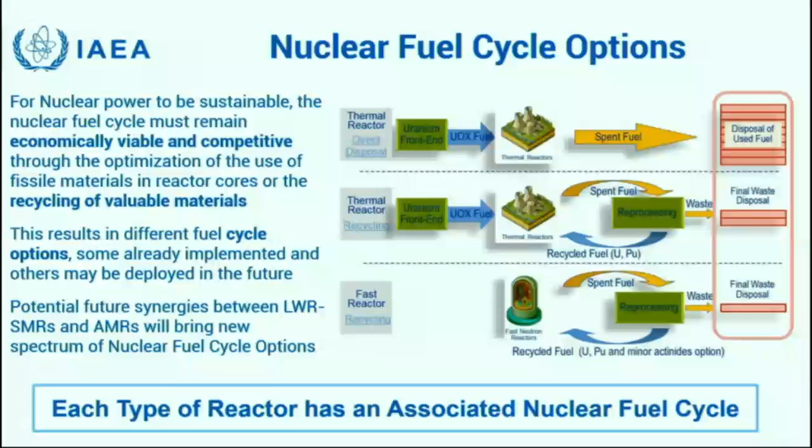This results in different fuel cycle options. The two first are already industrially implemented: the open cycle, which considers spent fuel as a waste, and the mono-recycling of uranium and plutonium. The advanced fuel cycles that will be implemented in the future will go through multi-recycling in light water reactors. And now with the incorporation in the near future of different SMR technologies, it will bring also a new spectrum of nuclear fuel cycle options to be considered.

With this in mind, we organized in September 2022 a technical meeting on back end of the fuel cycle considerations for SMRs. It was very well attended, with more than 100 people here attending the technical meeting.

There were about 16 online, 50 here in Vienna, and 3 international organizations. We broke out into different sessions because we discussed together, not wanting to leave any technology aside. During the breakout sessions we considered light water reactors, HTGR prismatic and pebble beds, and advanced modular reactors including fast reactors and molten salt. All discussions, conclusions, and material gathered during the technical meeting were compiled.

This was published as an IAEA TECDOC in December 2023 with reference 2014. We also conducted last year the IAEA international workshop on the chemistry of fuel cycles for molten salt reactor technologies, in cooperation with the OECD NEA. We had 4 developers and 40 experts from researchers and industrial partners who had worked for 30 years or more on molten salt and pyrochemistry.

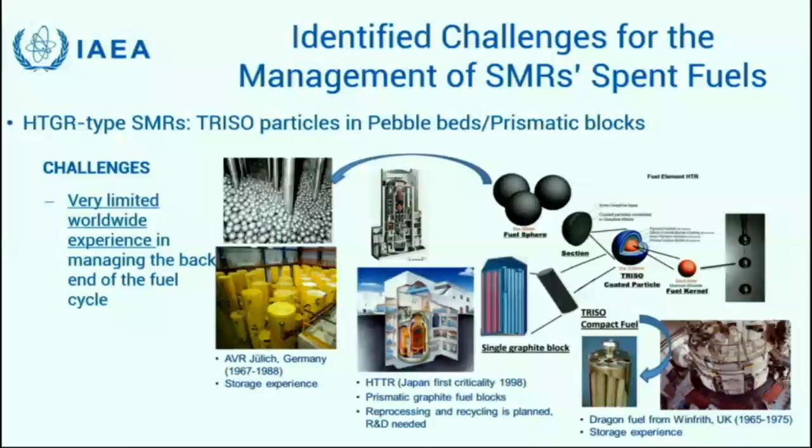For HTGR pebble beds or prismatic reactors, there is limited experience, found in Germany, UK, and Japan. Japan is also looking into processes for recycling TRISO particles. If these SMRs are deployed in countries with less mature programs or even non-nuclear countries, the supply chain will need to be developed to provide services to manage those spent fuels.

For fast reactors, the challenges will be more or less the same as those seen in large fast reactors, with new fuel characteristics like metallic fuels, nitride fuels, more plutonium content in oxide fuels, and the chemistry of those fuels. These are foreseen to be multi-recycled, so multi-recycling needs to be pushed ahead, either through light water reactors or going beyond to fast reactors.

In the case of molten salts, the chemistry is very challenging and aggressive. We discussed how to keep the loop with all these different types of fuels, how to keep recycling the fissile material in the core, how to extract the fission products, and how to manage the spent salt as a waste with all fission products inside. So this is a brief overview of the back end.

For transportation, it's package content specific, so we'll need to develop new solutions. We saw yesterday some industries developing solutions for transporting microreactors. What are the safety standards today? All the regulations are based on SSR-6, so new requirements will need to be identified and developed.

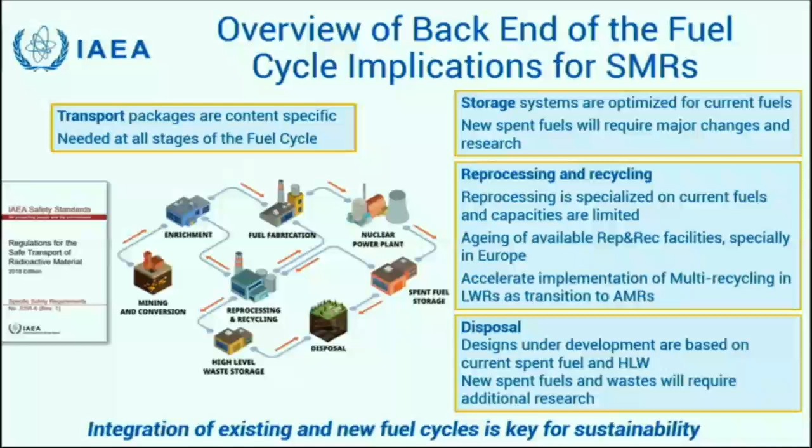With all this in mind, we received a recommendation from member states to the IAEA to launch a coordinated research project on challenges, gaps, and opportunities for managing spent fuel from SMRs, with the main objective to identify viable nuclear fuel cycle options for the different technologies, what can be used today, what can be derived from current technologies, and what will need fully new development from scratch. We also aim to prepare a list of generic key parameters for countries to perform their analysis within their own context and boundary conditions.

What we expect as our main outputs is to develop specific roadmaps for the different fuel cycle options. We have already identified the potential scenarios, let's call them like this, and then identify the nuclear fuel cycle facilities needed, the technology readiness level of the different technological solutions, which nuclear materials will be involved, and what waste forms will be generated, and which infrastructures will be needed.

We are not going to address everything, but identify what will be needed as an input to other activities, like human resources development, financing, which R&D will be needed, which demonstrators, and what can be the enablers and synergies between the different technologies for the fuel cycle.

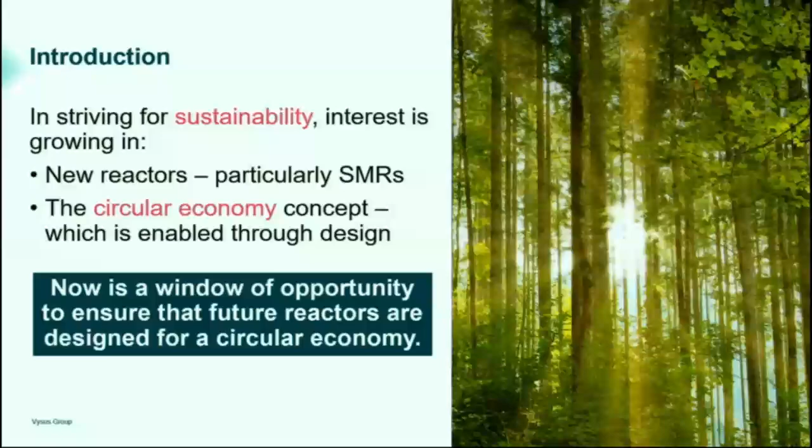So what is then a circular economy? Well, it focuses on the resources, the materials, and it promotes using, in short, as little as possible for as long as possible. There are many formal definitions. They haven't really landed yet, in my opinion, but these are kind of the common denominators. A circular economy is not the same as the waste hierarchy. There are common elements, certainly, but again, circular economy is much broader, much bigger.

Another key feature is that it cannot be achieved by one organization alone. So a lot of research right now is going into circular supply chain management.

Another highlight of a circular economy is that it's very much an emerging field, so no one really has all the answers at this point. It's ongoing work. But the work to date has mainly been focused on products that are transportable - think your washing machine or your car or your pens or materials like plastic - or it's been focused on the conventional built environment, your homes, your offices, and so on. But what does it mean for a complex industry like the nuclear sector, where each site consists of thousands of different products, components, and systems, made up of almost endless amounts of types of materials?

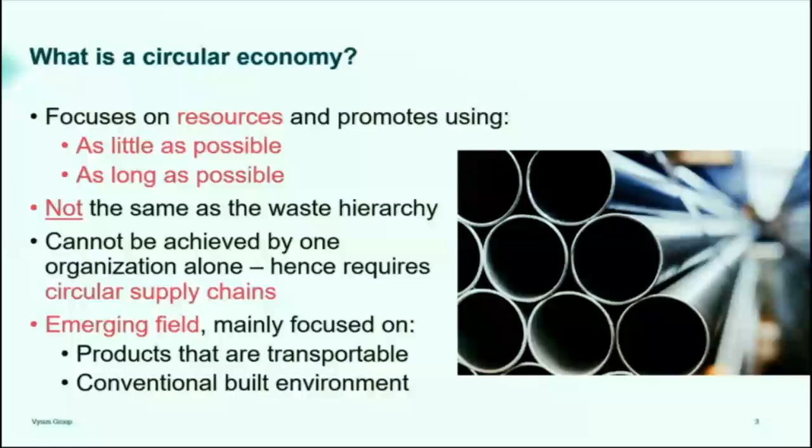Well, to start, I've been arguing for a few years now that we need to look at it really from a site level and approach a nuclear site from a circular perspective. I know we're hardwired almost in our industry to think linearly of the licensing steps, but from a site perspective, I don't think that makes sense, because once you've sited one facility and you constructed it and you started using it, that site will kind of forever be earmarked as an existing or a former nuclear site.

So getting in the mindset of thinking, you have the use phase and then you transform it to something else. That is, even the second time around, even if it's going back and becoming a nature preserve or just rewilding, you can, from a site perspective, really have different cycles of useful uses, and uses of when you're transforming the site into something else that hopefully is useful.

And then you can start drilling down from there. What does it mean to design a site, a facility, for a circular economy? Well, you need to have design principles, right? Because again, circular economy is enabled through design. Now, how do you do that on something that's so complex and has so many parts? Well, I thought it makes sense to start by separating into 3 different levels.

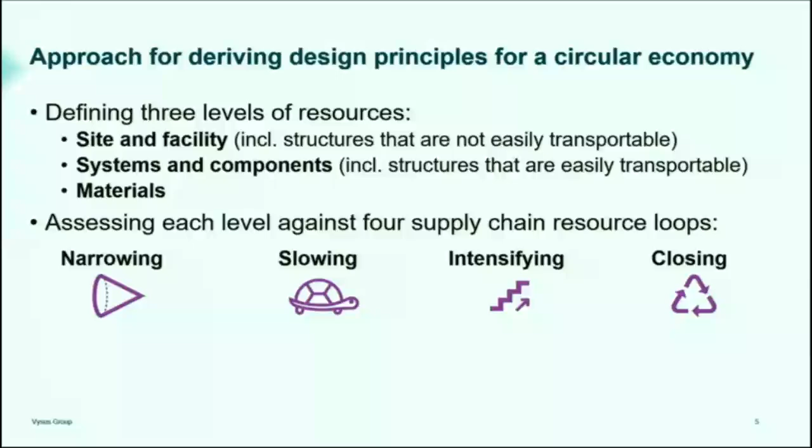Another dimension in deriving design principles, what seemed logical, is again the supply chain perspective. We hear a lot about supply chains, the importance of it, and again in circular economy, that's where a lot of the research is going - circular supply chain management. So using what has become very established, they call them loops: narrowing loops, slowing loops, intensifying loops, and closing loops. I'll get back to all of these to kind of overlayer those different levels and see what comes out.

And lastly, to consider the life cycle phases of a nuclear facility from a use perspective: what can be a useful use, and what can be used for the next phase, and so on. So what comes out if you put these layers together into something of a matrix, I guess?

Looking at the narrowing loop in circular supply chain management, what does that mean? Well, it means, in my words, reduce the input of resources, all types of resources, to enable the usage. In practice, you need less to make something ready for use. So this looks at the process before you get to your use phase.

What happens then if you look with interdisciplinary eyes at this? I'm not going to go through all of them, time doesn't allow, but just to highlight a couple of examples: at the site and facility level, it actually means try to reduce the physical footprint. That's a very simple key thing that emerges when you look at it through these eyes, because why take up more space than needed, right? At the material level, try to minimize the amount of material that you need during all phases, really. Less is more.

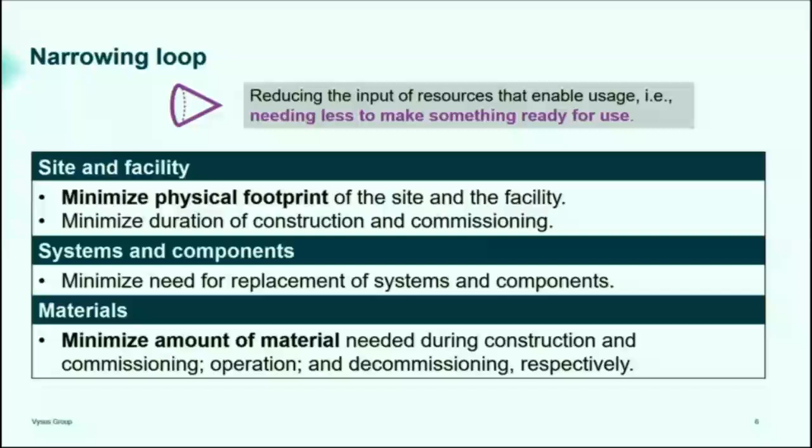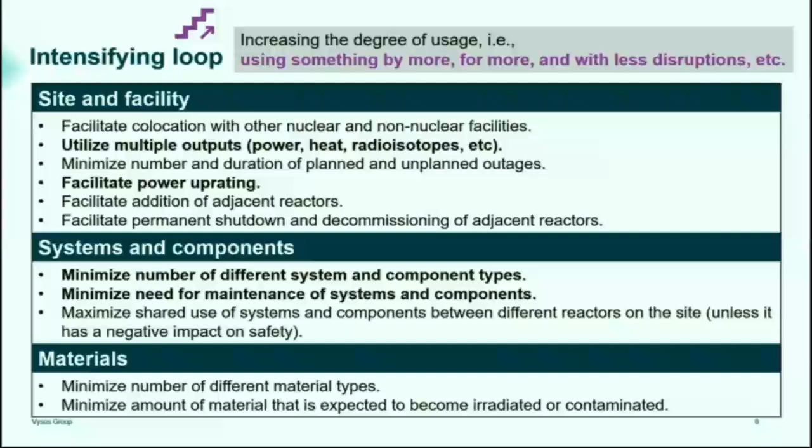At the systems and components level, minimize the number of different systems and component types, because that will simplify everything really, and minimize the need for maintenance of systems and components.

Lastly, the closing loop - and this I would say is where we hear there is good work going on, and it's definitely growing. I know IAEA is spearheading a lot of it. But when we talk about, I believe, when most people talk about a circular economy so far in the nuclear industry, we think about the closing loop. And the closing loop, in my words, is enable something to be used again. So whether it's recycling, repurposing, or reusing - again, that's just one aspect of a circular economy. When you translate that into these different levels, again, pretty intuitive, but facilitate. Think before you build it.

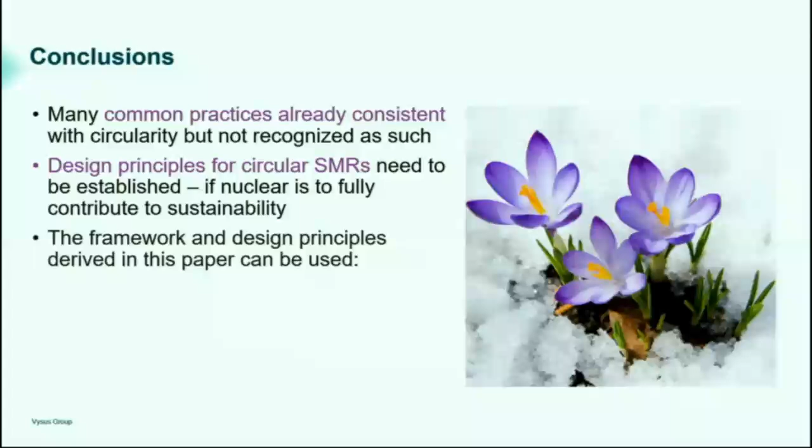They are being done for economic reasons, for safety, whatever, but it really is to extend the life of an existing facility. It is spot on circular economy. Why are we not talking about it? I don't know, I think we should. But in order to really contribute to a sustainable future, as we want and claim we do, we need to think beyond CO2 emissions and have design principles for circular economy, because there's so much more that can be done.

The framework and design principles I've shared with you today is, of course, just the beginning. It's at the conceptual level and intended to spark discussion and put it out there that more needs to be done if we are to tap into the capacity of contributing to sustainable development. They're done for early adopters, if you at least want to adopt the mindset of a circular economy into the designs. They are out there, you can download it. And it's, of course, just a starting point for future work.

I'd be more than happy to continue the discussion with anyone who's interested in small modular reactors in a circular economy. Thank you so much.

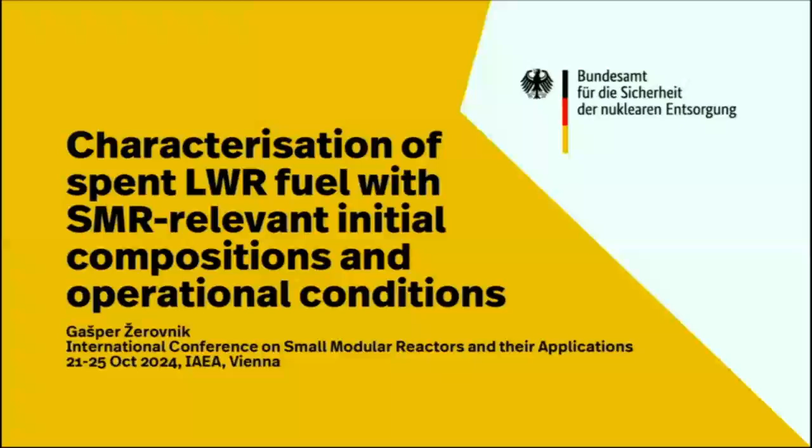Hello, thank you very much for the opportunity to present my work. As we have extensively heard during this week, there is a large number of LWR SMR concepts in different stages of development.

One very simple consideration, in comparison with a classical large reactor concept, is that due to a smaller size, we have higher neutron leakage. This directly results in lower fuel burnup and more activation of the structural components. There are some adaptations proposed to fuel and core design to mitigate that, such as higher initial enrichment, or in case of MOX fuel, higher plutonium content, or use of more efficient reflectors, such as stainless steel. There are also other adaptations that might not have direct correlation with the above concern, such as lower power density, but this also has some implications to the waste streams.

There are, of course, other modifications and adaptations proposed, but this was out of scope for this study. Now, the main question here is: how does the reactor size, together with some other adaptations, affect the physical parameters and the waste streams for such reactor fuel? So the case study was a typical PWR fuel. As we know, there are several proposed SMR concepts which basically use fuel of very similar geometry and material composition as large PWRs, so this was taken as a reference case.

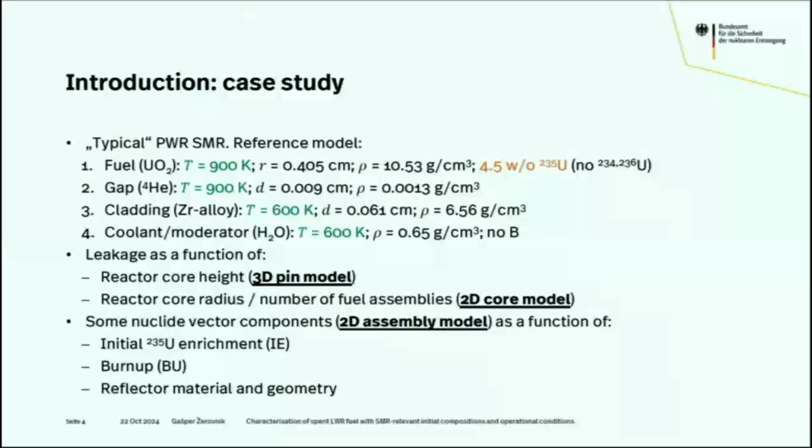About the computational model, all calculations were done with Serpent code and the ENDF v7.1 library. I will not go into other details.

So for the 2D core model, the number of fuel assemblies was between 37, which corresponds, for example, with some SMR concepts, or 241, which are the largest light water reactors available. These calculations were done only with fresh fuel, with vacuum boundary conditions, and here a comparison of the effective multiplication factor with the multiplication factor for the infinite medium was done.

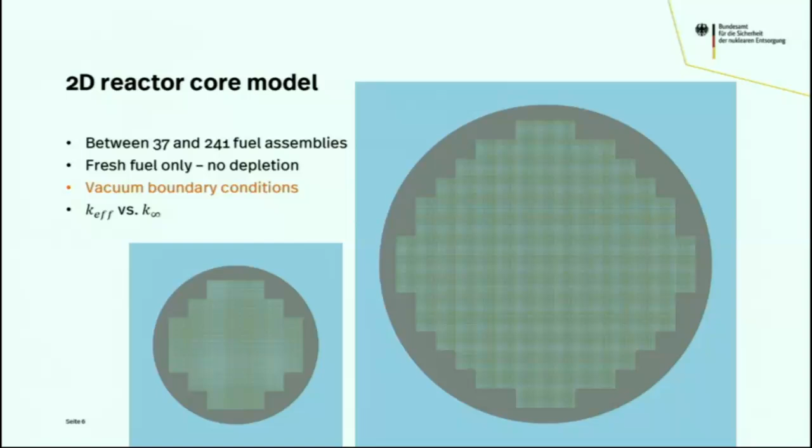Similarly, to simulate axial neutron leakage, a 3D fuel pin model was done with vacuum axial boundary conditions, but reflective in the radial direction, and also without depletion.

The third series of models was for depletion calculations, using a 2D assembly model, typical PWR 17 by 17 pin geometry. The depletion was done up to 100 megawatt days per kilogram to cover all predicted cases, and three different models with three different boundary conditions were done.

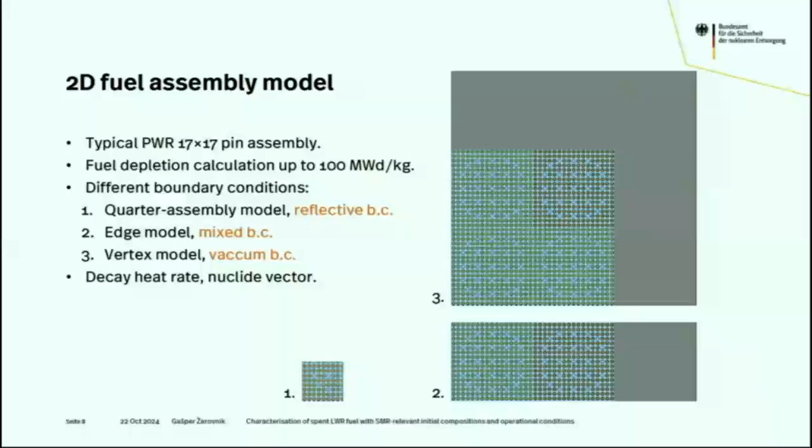So the quarter assembly model, which has a reflective boundary condition representative of an assembly somewhere in the middle of the core, and then edge and vertex models as well. Here mainly decay heat rate and some components of the nuclide vector were observed.

Now to present some results. First, the neutron multiplication factor, which is directly linked with the neutron leakage.

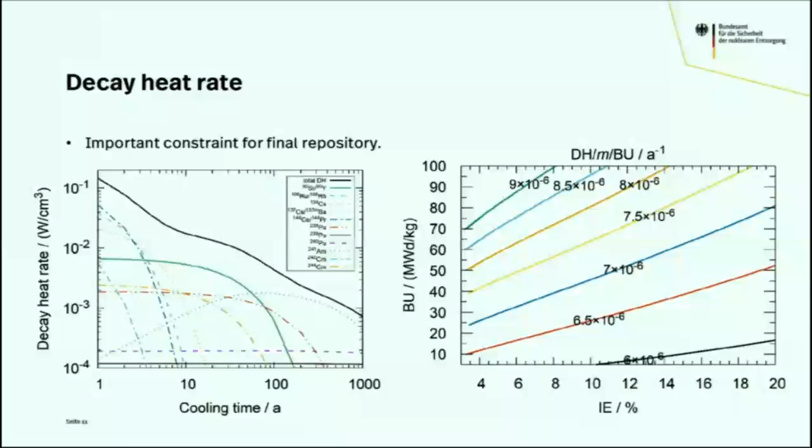Now to look at some individual nuclides, already mentioned americium-241: what is interesting is that the functional dependence on burn-up also depends on the initial enrichment, but generally we can see it decreases with increased initial enrichment.

Another nuclide, plutonium-239, which is also important for several reasons, here I would mention proliferation. We see the opposite trend: if the initial enrichment is increased, then for higher burn-ups we produce more plutonium-239, and also in higher isotopic purity, which you cannot see from this plot.

Curium-244 is a dominant contributor to neutron emission for cooling times up to 100 years, and here we can see that its production is greatly reduced with increased initial enrichment.

Strontium-90 is one of the important contributors, in the time frame of a few decades, to the decay heat rate, but also one of the major beta-minus particle emitters. Here there are smaller differences, but you have an increase with increased initial enrichment, mainly due to differences in the cumulative fission yield of strontium for U-235 and plutonium-239.

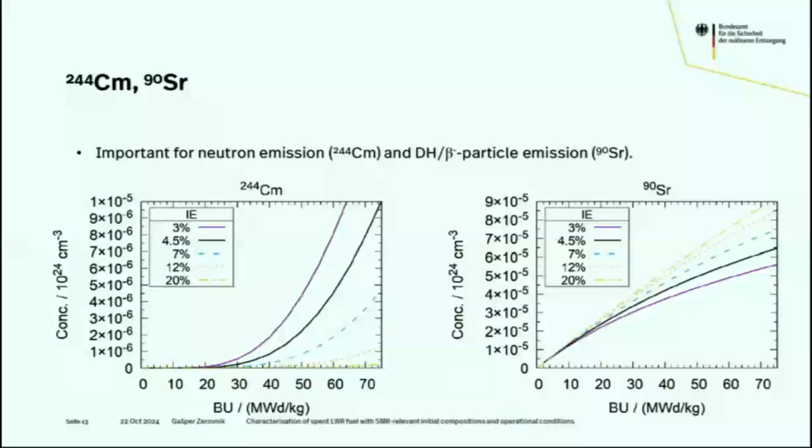Then maybe also to have a look at some very long-lived fission products. There are not many, and they are many times ignored, but actually there is a handful of fission products that have half-lives into the hundreds of thousands to millions of years. Two important cases are iodine-129 and...

...cesium-135. For iodine, there are no major differences. This dependence is close to linear with burnup, and there is no major dependence on initial enrichment. Similar is the case for technetium-99, which is not shown here.

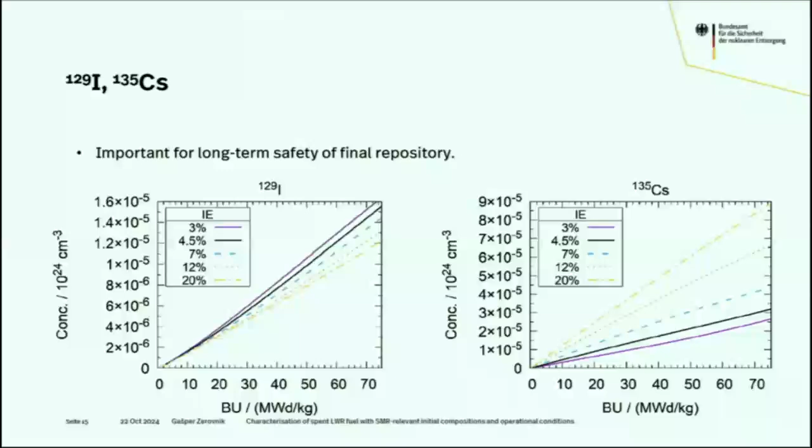But on the other hand, with cesium-135, increased initial enrichment causes the inventory to also significantly increase. And here even more, not shown on the plot: if we reduce the power density, its inventory increases even more, because this is related to the reduced neutron capture in xenon-135, which we all know is a neutron poison.

To conclude, the effects of reactor core size on some aspects of operation and waste streams were studied. A reference SMR PWR core has a neutron multiplication factor, according to these assumptions, around 8% lower. But with different assumptions, this number could be slightly different compared to a large PWR, which may lead to an increase of ex-core component activation.

The maximum achievable burnup under these assumptions is about 15 megawatt days per kilogram lower. This can be compensated using a higher initial enrichment, which inevitably leads to increased depleted uranium stockpiles. But on the other hand, there is a slight decrease in the decay heat rate, which may reduce requirements for interim storage and final disposal.

From the aspect of the long-term safety of high-level waste disposal, the impact of iodine-129 and technetium-99 is small. However, the production of cesium-135 is expected to be significantly larger, especially if the reactors are operating at lower power density compared to their larger counterparts.

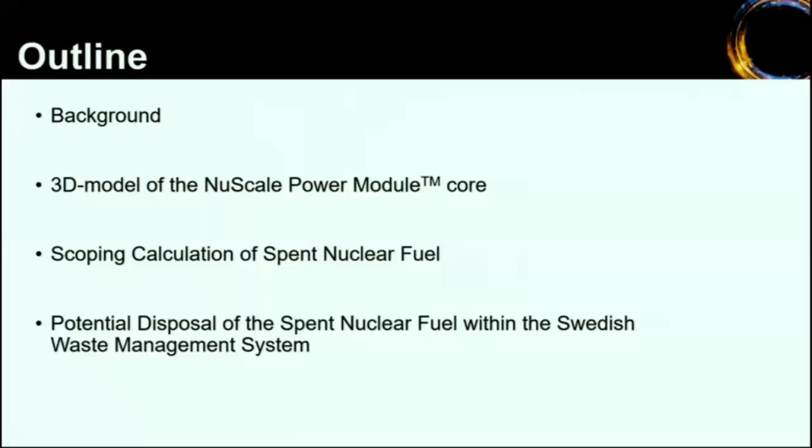NuScale power module, or NPM in short, is an integrated light water pressurized water reactor, which means the steam generator and the reactor pressure vessel are integrated into a metallic containment vessel. The core cooling is based on natural convection, which means passive safety, with no main circulation pumps.

For this study, we used the 50 megawatt electric design. We knew about the power upgrade to 77 megawatt electric when we started the study, but we used the documents that NuScale submitted to the NRC, and those are still based on the 50 megawatt design.

12 of these modules can be combined into a VOYGR plant with one control room, and all of these modules sit in the spent nuclear fuel pool while they're operating, so they're surrounded by borated water. Each module is about 25 meters long, 4.6 meters wide, and weighs about 600 tons.

For this calculation, I used Serpent as well. Serpent is a three-dimensional neutron and photon transport code that uses Monte Carlo methods. It was developed at VTT Technical Research Center of Finland since 2004. It's quite easy to use.

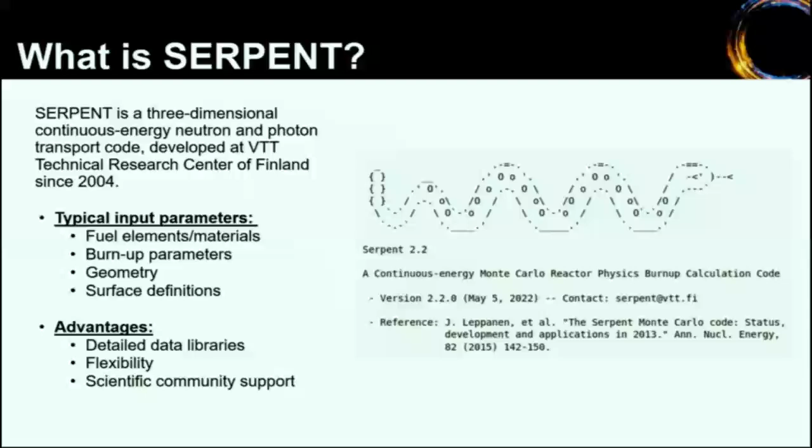Okay, so NuScale's equilibrium core is a bit different. They have 37 fuel assemblies in total, but these fuel assemblies have 3 different types of fuel enrichments, as well as 3 different burn-up histories. Now, I will explain what this means.

To get to this equilibrium core in Serpent, I started modeling with just a fresh core with 3 different enrichments, which is shown in blue color. Then I burned this core for 2 years, which is 1 cycle for NuScale. So they refuel every 2 years. After burning the fresh core for 2 years, I end up with 37 once burned fuel assemblies.

Then I replace the fuel assemblies on the periphery and in the center, shown in circles here, with fresh ones. I end up with this configuration, where there's fresh on the periphery and in the center, and these reddish ones are once burned. Now I burn this configuration once more for 2 years. That becomes once burned on the periphery and in the center, and twice burned in the center.

I do replacements once more. I put fresh on these edges and once burned right below them, and leave these twice burned as they are, which takes us to the equilibrium core. So this is what NuScale's core looks like.

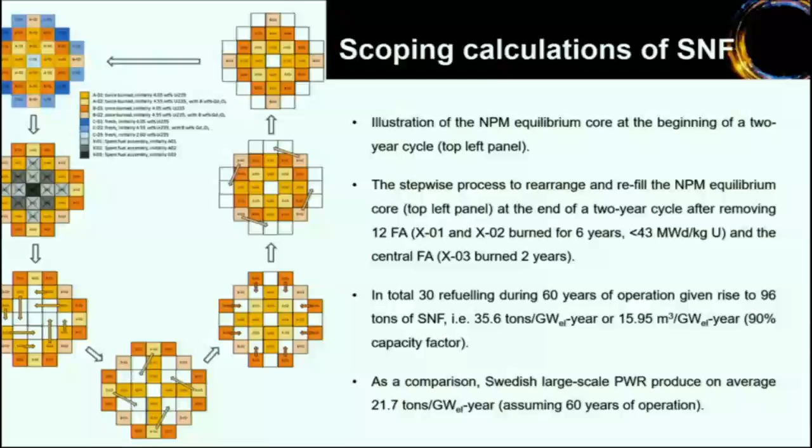However, NuScale power module fuel assemblies are approximately 57% of the length of a conventional PWR fuel assembly, so NuScale's assemblies are shorter, about 57%. Therefore, we assumed that if needed, shorter canisters would have to be designed for that. The same design, just shorter.

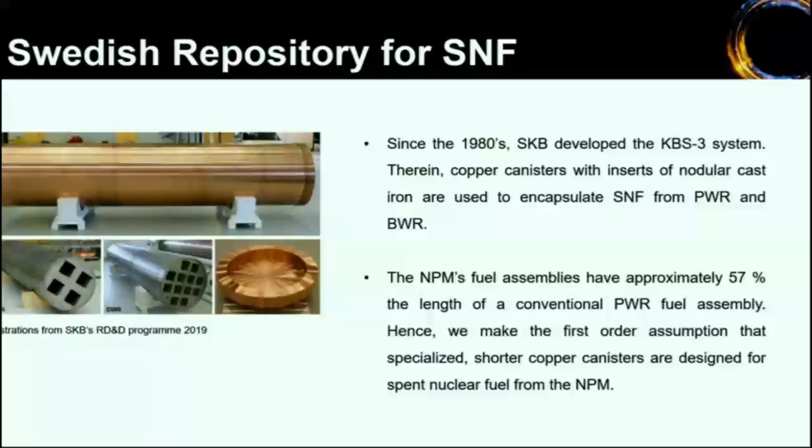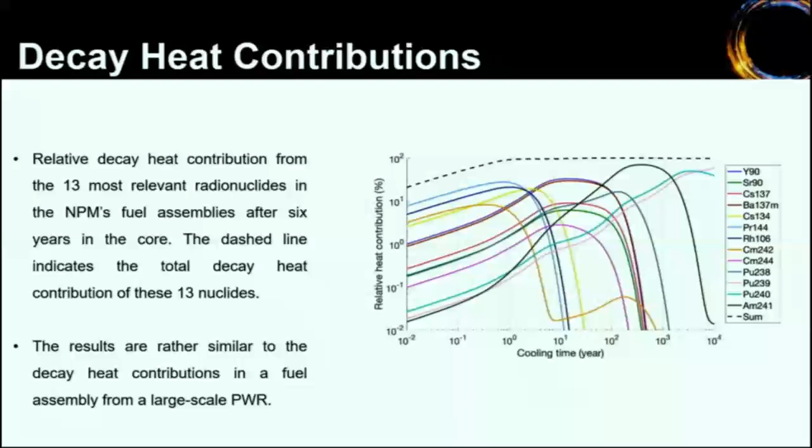I think that's all from me. Thank you for your attention.

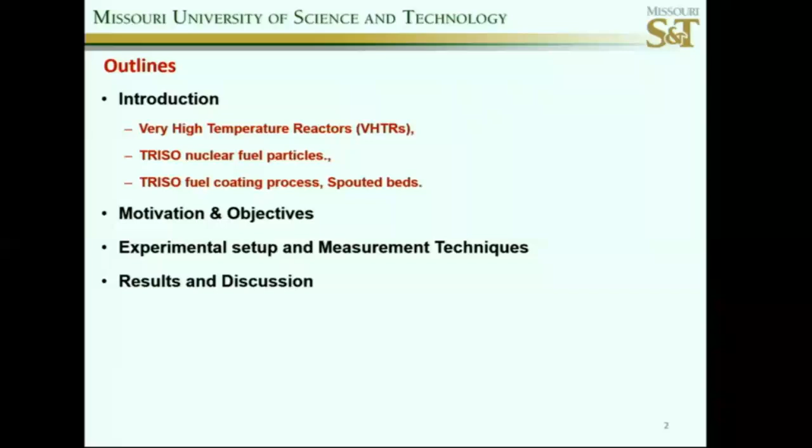The very high temperature reactor is a very promising candidate among the 6 candidates of the 4th generation nuclear reactors. We have 2 designs in the VHTRs: one is the prismatic bed reactor and one is the pebble bed reactor. In both designs we use the TRISO nuclear fuel particles, but the deployment of the TRISO fuel particle in these reactors is different between the prismatic and the pebble bed reactor.

In the pebble bed, we have graphite pebbles where we insert thousands of TRISO nuclear fuel particles. In the prismatic bed, we have a hexagonal graphite block where we also insert thousands of TRISO nuclear fuel particles.

A very important point here to emphasize is that the efficiency and safety of both of these reactors depends extremely on the quality of the TRISO fuel particles. So the acceptance level of defective TRISO fuel particles to be implemented in such reactors is ultimately zero. There should be no defects in the TRISO particles used in such reactors.

This is a very important point that drives us to investigate the hydrodynamics of the TRISO coater, which I will elaborate further on why the hydrodynamics are important for such a purpose. So it's very important here that the TRISO is the heart of the operation and safety of such reactors.

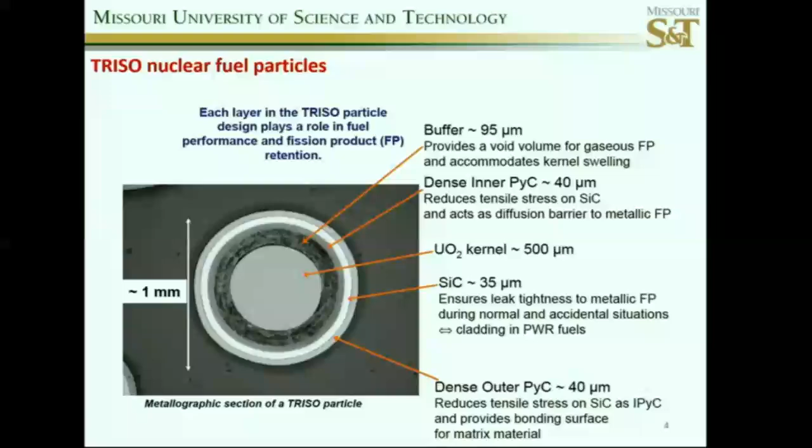So what is the TRISO? Basically, we have the fuel kernel made of UO2 or another fertile material, then coated by 4 different layers. These layers are made of carbon and silicon carbide, which is the strongest one of the TRISO. The size of the TRISO is maybe about 1 millimeter.

What is the TRISO coating process? It's conducted in a gas-solids contactor reactor used in chemical engineering, called a spouted bed. This is a gas-solids contactor used for many purposes, such as gasification, combustion, and mining, but also used to handle heavy coarse particles, like the high-density fuel kernel, applying the coating layers one after the other through a chemical vapor deposition method.

What is the point here? It's very important to emphasize that the process of coating the TRISO fuel is a delicate process.

Also, the quality, as we mentioned before, there should be no defect. The process is also very complex, since if there is a failure in one coating layer, that failure will apply to the other coating layers applied on the TRISO fuel particle. So the quality of the TRISO fuel particle, whether it's uniformly coated or non-uniformly coated, depends extremely on the hydrodynamics of this spouted bed.

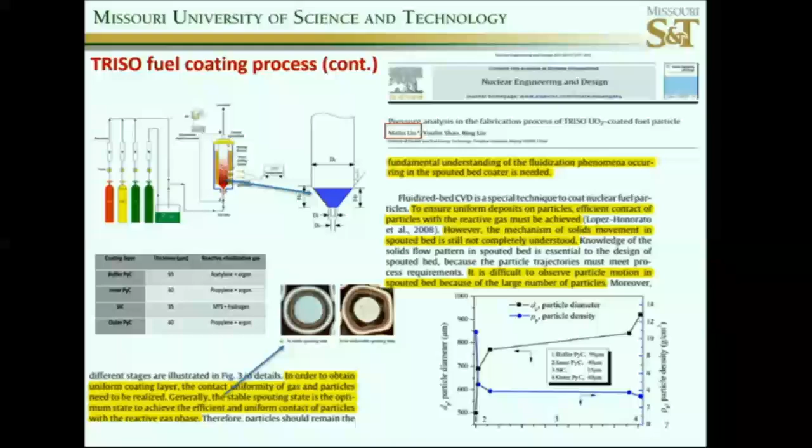So moving on, we applied advanced measurement techniques coupled with computational fluid dynamics to investigate the hydrodynamics of this spouted bed, then tried to address the scale-up issue of this spouted coater, since the existing size of this spouted bed coater is currently small.

So we applied the scale-up study. To apply the scale-up study, we manufactured two spouted beds of different sizes: one is 6-inch and one is 3-inch, to investigate the scale-up and also the hydrodynamics, where we ran a series of experimental and computational studies.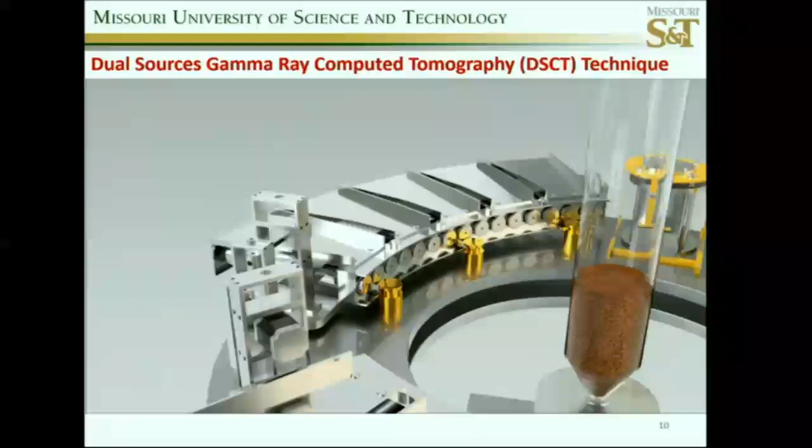So the first technique we applied is called gamma-ray computed tomography. It's one of its kind, a highly sophisticated technique that can rotate 360 degrees around the object that needs to be scanned, and then give us the gas hold-up and solids hold-up distribution among the system that we need to investigate.

The second technique we applied is called radioactive particle tracking, where we use one particle as a tracer particle that moves freely within the solid bits or other particles, and then we gain 3D velocity fields of the system. So we applied sophisticated techniques coupled with computational fluid dynamics to address the scale-up issue related to the spouted bed coater.

So the first thing we did was try to assess the current scale-up methodologies found in the literature regarding the scale-up of the gas-solid spouted bed. We assessed the current scale-up methodology and found it's not sufficient to obtain similarity.

Then we came up with a novel scale-up methodology based on matching the gas hold-up distribution between the small size and the large size of the spouted bed.

So the scale-up says the following: if you have two different spouted beds of different sizes but geometrically similar, and you apply different conditions, and you obtain the gas hold-up matching between the small size and large size spouted bed, this can lead to hydrodynamic similarity between the large and small size spouted bed, which means a successful scale-up approach.

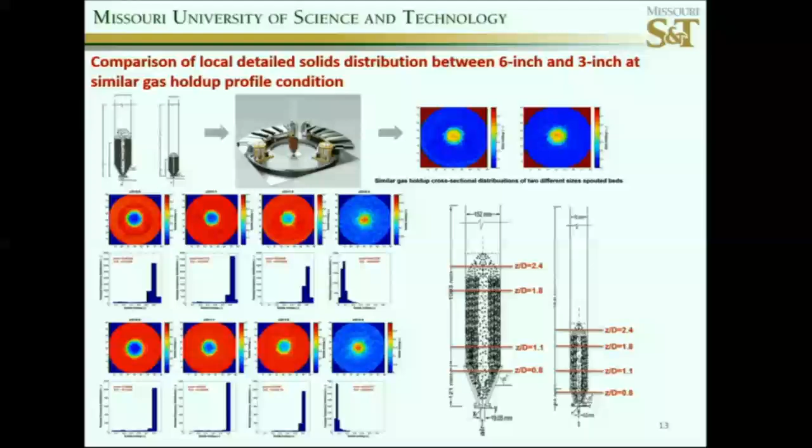So we applied our novel methodology of scale-up using the CT techniques at different dimensionless heights between the small and large size spouted bed, where we obtained a matched gas hold-up distribution between the small and large size spouted bed. This is the profile of the solids hold-up among the height of these spouted beds at all the regions: the spout, the annulus, and the fountain.

And we can see here that we obtained a matching gas hold-up profile between the two spouted beds. And when we apply different conditions that don't give us this similar gas hold-up profile, we don't obtain the gas hold-up distribution matching among the different sizes of the spouted bed.

So also another important point is about the residence time distribution, where the particle takes place. What is the residence time of the particle within the spout where the coating is applied?

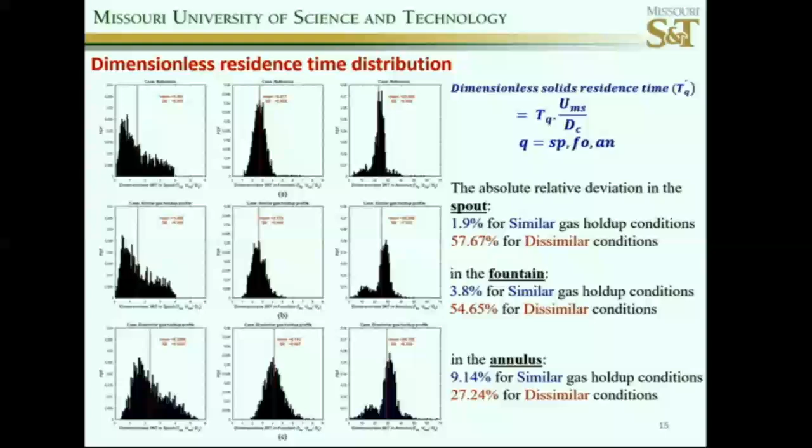So we also obtain matching and hydrodynamic similarity between large and small size spouted beds applying our scale-up methodology. Another parameter obtained using the radioactive particle tracking technique is the particle cycle time spent in each region of these spouted beds, and also we obtain similarity between the large and small size spouted bed. This is how we validated our techniques, also between the CT and the RPT.

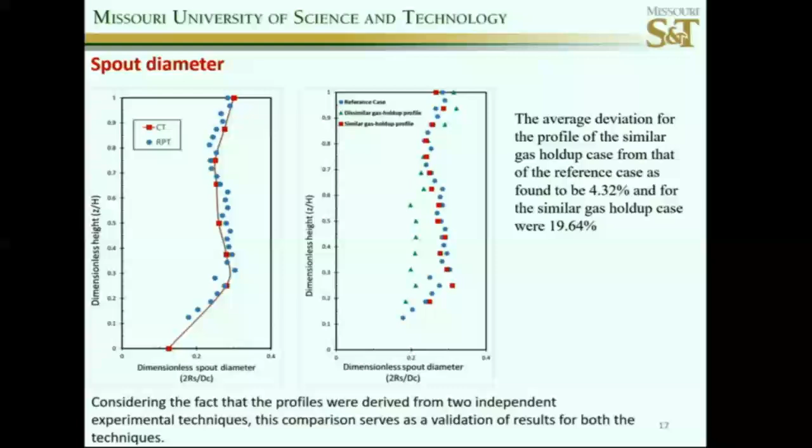Where we have a good result between the spout shape obtained by the two techniques. That's it, but here is another study worth mentioning, conducted by Wang Xuan, about a spouted bed not only to manufacture the tristructural nuclear fuel particle, but also as a nuclear reactor. It's a conceptual study. So we have a spouted bed to manufacture the triso fuel particles, but we could also have a spouted bed that operates this triso fuel particle. Why is that? Because a spouted bed can give us good heat transfer and good circulation of the particles among the bed, and they obtained very good results.

That constant mixing potentially leads to a uniform burn-up of the uranium particles inside this spouted bed. So I think I've reached the final part of my presentation, but again trying to emphasize the outlook of the fuel technology, coating technology, how it's important, what we are going to apply in the future. We may apply different coating layers or different concepts of fuel. This is why it's important about the spouted bed that we mentioned in this study. Thank you so much.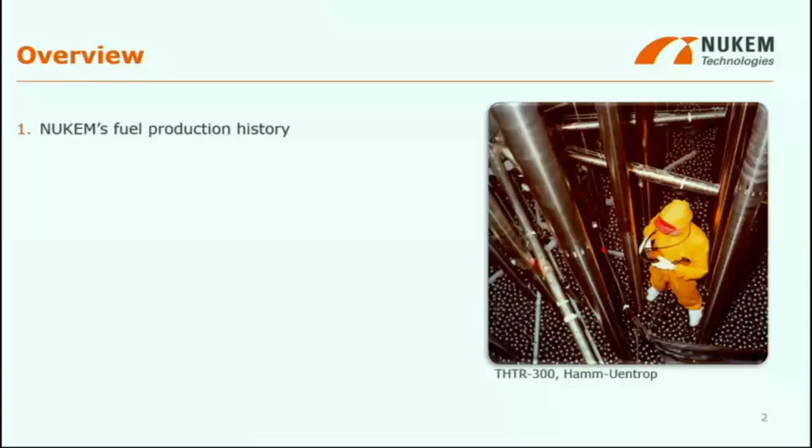I'll give first an overview of my presentation. I will talk a little bit about Nukem's fuel production history. Then I will repeat major SMR concepts and their fuel, looking from this aspect. Then I will talk about SMR fuels from HALEU UF6 deconversion. Fourth topic is related to the metallic uranium versus HTR triso fuel production route. And then last but not least, a few words about high-temperature small modular reactors.

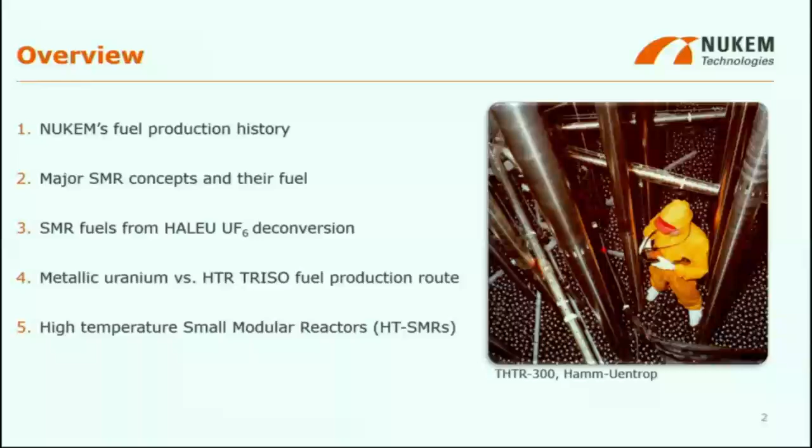So let's begin a little bit about the history of my company, Nukem. Nukem is, in fact, a fuel production company that was founded a long time ago, and in the Constellation Nukem Siemens fuel plant, it exists in Hanau, Wolfgang, Germany, or it existed, better to say. This story began in the 1950s.

Fuel assemblies from uranium metal were produced for FR2 in Karlsruhe and for ECO in Ispra. In the 60s, from uranium alloy that was up to 93% uranium-235, meaning highly enriched fuel, it was also the fuel assembly for material test reactors.

In the 70s, there was an AUC pilot plant, once again high-enriched fuel for oxide-based UO2 fuel assemblies, and this was in fact the production route for all German reactors.

After that, in the 1980s to 2000, an AUC uranium metal plant was planned for Batam, Indonesia, and also for MTR by Siemens Halle, once again in this case not so highly enriched, but only 20% enriched uranium-235, where rework and recycling was included.

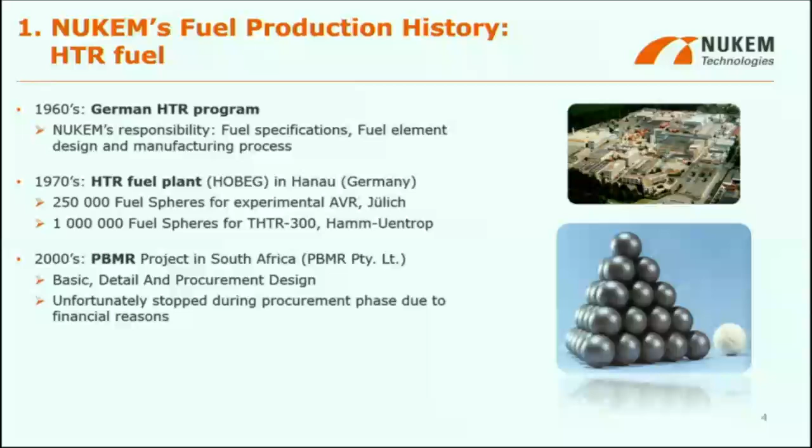In 2000, we were involved in the PBMR project in South Africa. We were responsible for basic, detail, and procurement design, but unfortunately, because of financial reasons, this project was stopped. And last but not least, in 2010, laboratory scale facilities were designed and also to be found in Indonesia and South Korea.

Not going into details, but I want to say something about the history of HTRs. On the right-hand side you see the German history that began with the AVR reactor, then went to the THTR reactor, and a lot of other HTR reactors like RDE, PBMR, HTMR-100, or VGM. On the left side in China, HTR-10 and HTR-PM, and last but not least in the United States, the Xe-100.

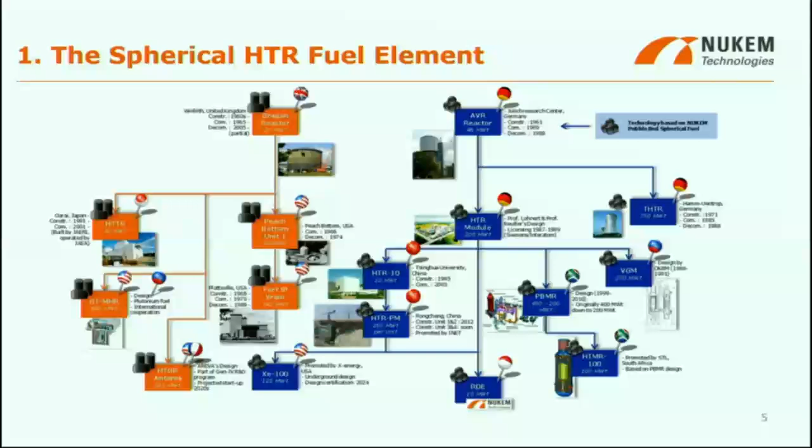On the left-hand side you have the UK story of HTR facilities, something we also heard today, beginning with Dragon, Peach Bottom, Fort St. Vrain, then HTTR and GT-MHR and other facilities. So this kind of nuclear power plant has a long history.

I want to remind all of us what small modular reactors are, so up to 300 megawatt electrical. We can speak about liquid metal cooled SMRs with uranium metal alloy, MOX plutonium, or depleted uranium, with fast neutrons, coolant Na, Hg, Pb, Sn, and an example for that is the sodium-cooled fast reactor. In the next group, we have water-cooled SMRs with UO2 pellets, MOX, thermal neutrons, light water as coolant, and pressurized water reactor as example.

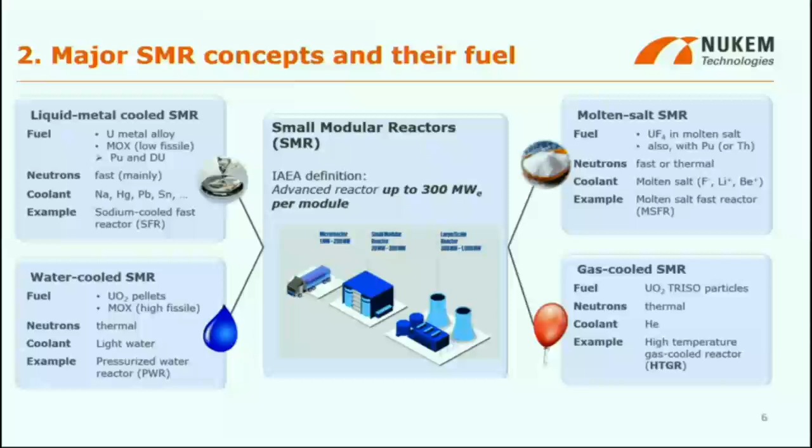Molten salt reactors with UF4 in molten salt, also with plutonium or thorium, neutrons can be, as we have learned, fast or thermal, coolant is molten salt with different elements, and an example of that is the molten salt fast reactor. And then, last but not least, my favorites, gas-cooled reactors with HTGRs, with UO2 triso particles. We have heard a lot about them in the last session, with thermal neutrons and helium as coolant, and an example is the HTGR reactor.

Let's look at what can be produced from HALEU UF6 deconversion. So beginning with UF6 that is 20% enriched, we come to AUC, ammonium uranyl carbonate. From that we can get U3O8, and that via TRISO particles gives our fuel compacts or fuel spheres.

Then from AUC we can get UO2 for oxide pellet-based SMRs. We can get UF4 for molten salt SMRs. Then we can get uranium itself for fast neutron SMRs. And in the scrap, by recycling, we can get uranium nitrate and once again give that to AUC to close the cycle.

Because of the lack of time, I am not going to read through these different equations that I put on the left-hand side, as I know this presentation will be available after the conference. You can see in the first equation how we get AUC, in the second how NH3, CO2, H2O is obtained, in the third how UF4 is obtained, and in the fourth, uranium with calcium difluoride, about which I want to spend a few words.

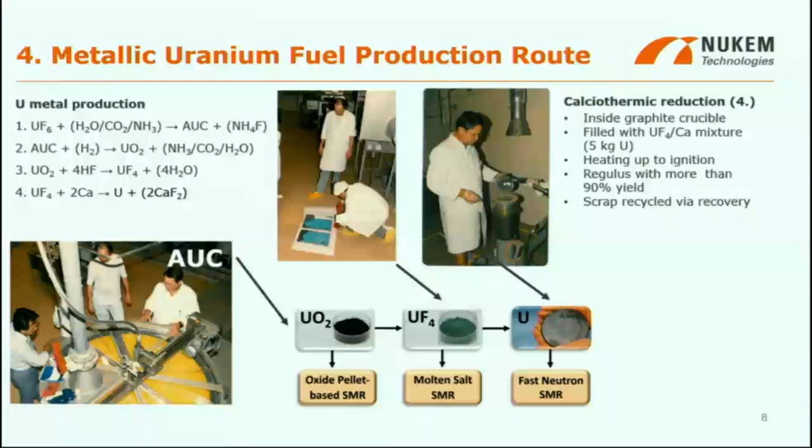Once again, starting with the TRISO fuel production route: U3O8 gives the TRISOs, so fuel compacts and fuel spheres in high temperature reactors, as a reminder. Let's look at a few aspects of how these HTR fuel production kernels can be set up.

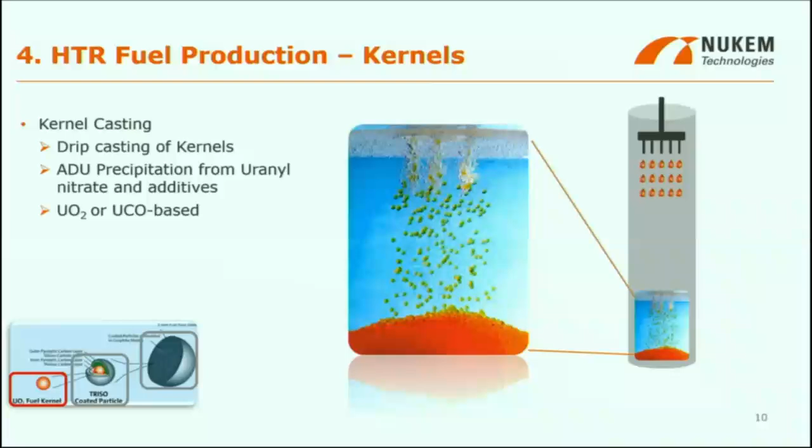We begin with kernel casting, that is drip casting of kernels in the first step. Then ADU, ammonium diuranate precipitation from uranyl nitrate and additives takes place, and after that we get UO2, the old one, or now very modern thanks to the US program and AGR, UCO, uranium carbide oxide particles.

Nukem has developed a very specific coater that is, of course, the key equipment to achieve standard quality. The procedure by which the coater is established is the so-called chemical vapor deposition, using different chemicals like acetylene, propylene, and methyl trichlorosilane, shortened here as MTS.

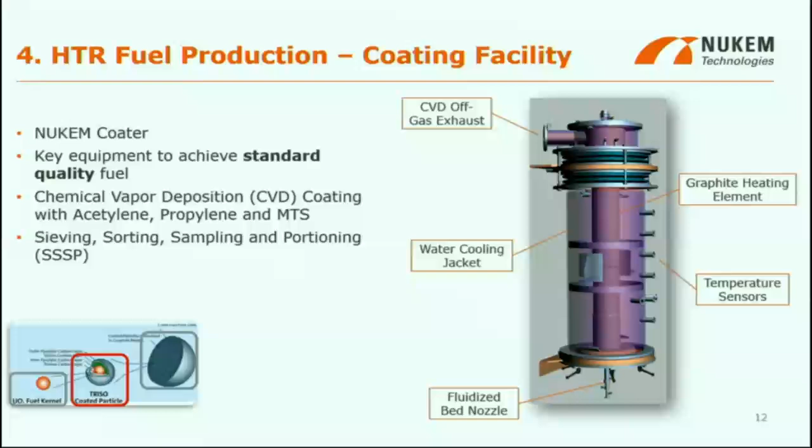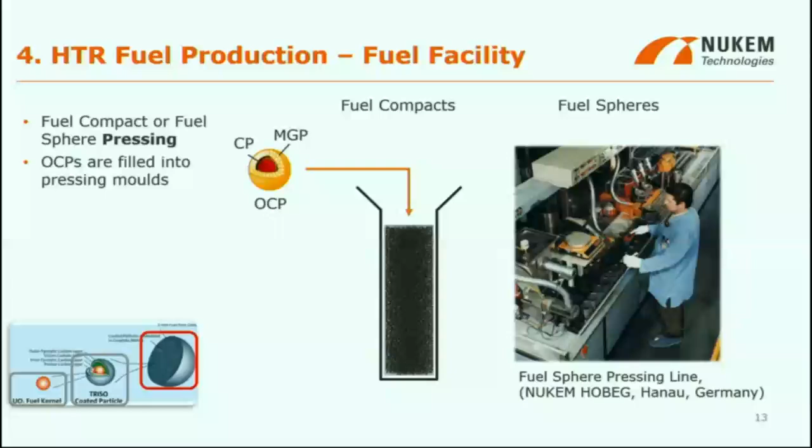In the next step, we compact our coated kernels. Fuel compacts or fuel spheres are produced via pressing in different pressing machines. OCPs, overcoated particles, are by that procedure filled into pressing molds. Here you can see, as one example, the fuel compacts, and on the right-hand side, fuel spheres from the HOBEG Hanau facility.

Next step in producing the fuel elements for the HTR is once again coming to different ovens. First, carbonizing is induced at 800 degrees. Then annealing follows at a much higher temperature, that is 1,900 degrees. Last but not least, a very sophisticated final quality control takes place.

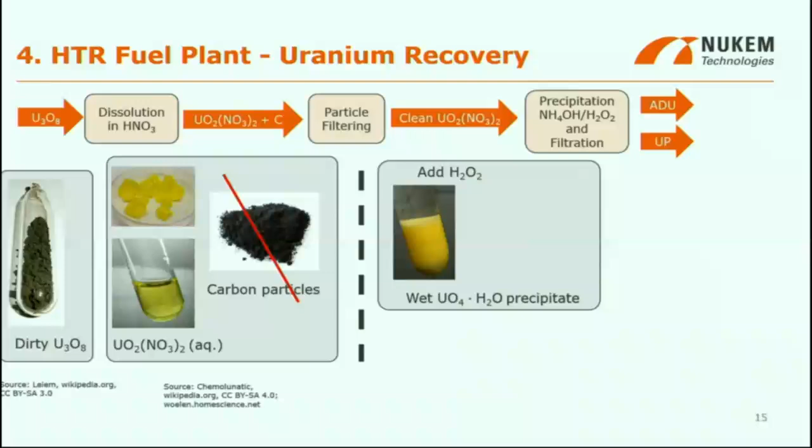A few words about uranium recovery to close the cycle. From U3O8, via solution in HNO3, we come to UO2(NO3)2. After carbon particle filtering, we get the clean chemical I mentioned a minute ago. After that, precipitation takes place, and after precipitation and filtration we get ADU, ammonium diuranate. UP is uranium peroxide, so that at the end of this story we get nuclear-grade U3O8, closing the circle of fuel production.

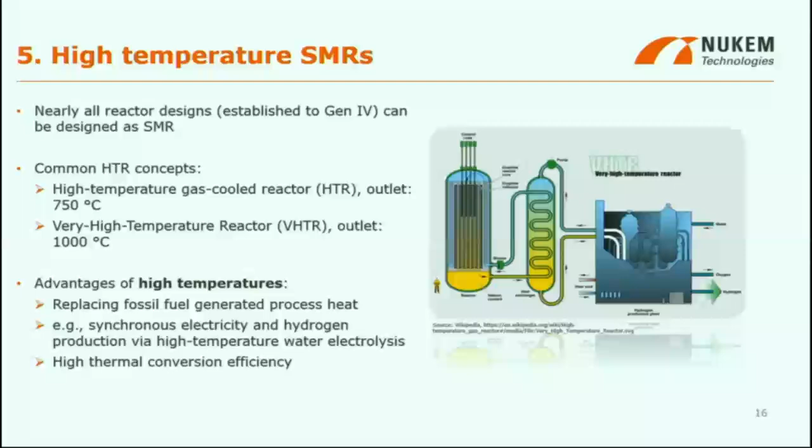In the next two slides, I want to say something about high-temperature SMRs, although we have touched on that already. As we know, all reactor designs up to Gen 4 can be designed as SMRs, but HTRs have very high temperatures that make it possible not only to produce electricity but also heat and other industrial applications. A very high temperature reactor has an outlet of 1,000 degrees. What are the advantages of these reactor types? Replacing fossil fuel, synchronous electricity and hydrogen production, and of course very high thermal conversion efficiency.

With high temperature SMRs, we have less fissile material, which increases safety, along with standardization of components and integration of design, reducing complexity. There's also flexible application in industrial cluster areas, as I already mentioned, meaning less grid restriction.

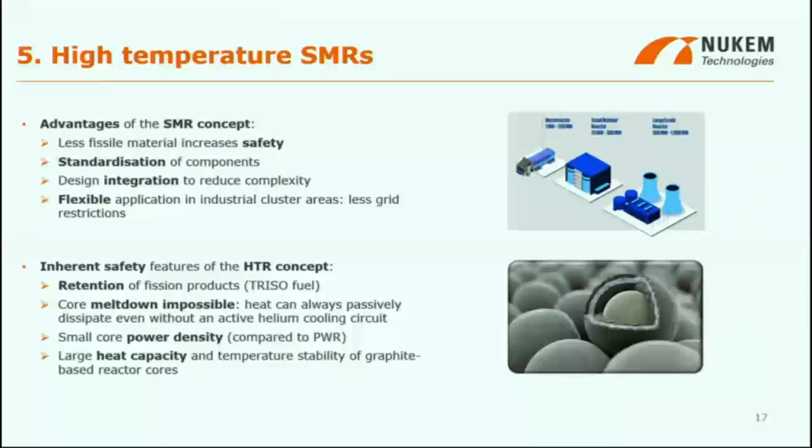My PhD was on the safety of HTRs at the Jülich Nuclear Research Center, a long time ago, and since then I have really liked the HTR concept because of its inherent safety: retention of fission products, core meltdown is impossible because heat can always dissipate even without active helium cooling, small core power density, large heat capacity, and temperature stability of graphite-based reactor cores.

So that was a small excursion into the world of HTRs and another type of fuel. Thank you very much for your attention.

Thank you very much, Marina, for this very comprehensive presentation about the chemical processes to fabricate TRISO particles. At the bottom of my heart, the chemistry is very interesting. So they have time for a brief question. Is there any question from the floor?

Yes, please. Thank you for this interesting presentation. I just have a question: is there a pathway to close the fuel cycle from the spent fuel?

In this moment, no. As we have learned, I am speaking about closing the cycle by production of different parts. That is a challenging issue. Perhaps somebody of the young people here in the room can solve that and get the Nobel Prize. In this moment, no. Okay.

Our next speaker, a great pleasure to introduce you to Adam Lever, Nuclear Transport Solutions in the United Kingdom, and he's going to talk to us about the development of a versatile Type B transport package to support the front-end fuel cycle of Generation 4 reactors.

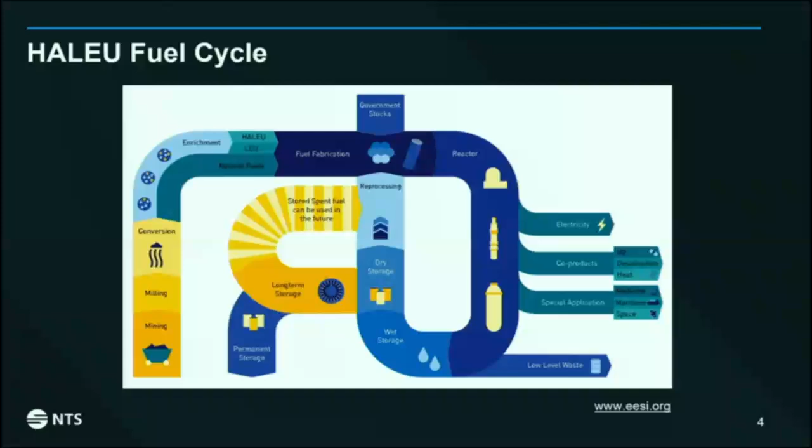So this would be HALEU powder in the form of UO2 and also TRISO fuel. Where does that fit in? So that UO2 HALEU powder fits in post-enrichment and pre-fabrication. That's the main area we're looking at. And then the TRISO fuel comes in post-fabrication and going into the reactor.

So what are the assumed contents? We've looked at some cans, these are from an INL report, so it was over in the States, we got this can design from there. There wasn't too much, this was, I think, concept level design, so it still could change. Have we deemed it worth enough for developing?

As mentioned, it would have UO2 powder. We weren't too sure whether it was going to be up- or down-blended, this material, and for that reason we assumed worst case. We went for down-blended, so it would be military grade down-blending to that 20%. And this material would be in a package, and these packages will be inside a standard 20-foot ISO container, which makes it a bit easier for manoeuvring and getting about the world.

The design philosophy: we want to try and utilise as much COTS material as possible. COTS is commercially off the shelf, so this is standard components and parts that you can get from most suppliers across the world. This means it's much cheaper and it's also a lot more sustainable. There's an interchangeable basket design, so we would have one basket design for the HALEU powder, one basket design for TRISO. Having that same package design means it's much easier for manufacturing and getting there, and also the versatility means that it's much easier for operating on.

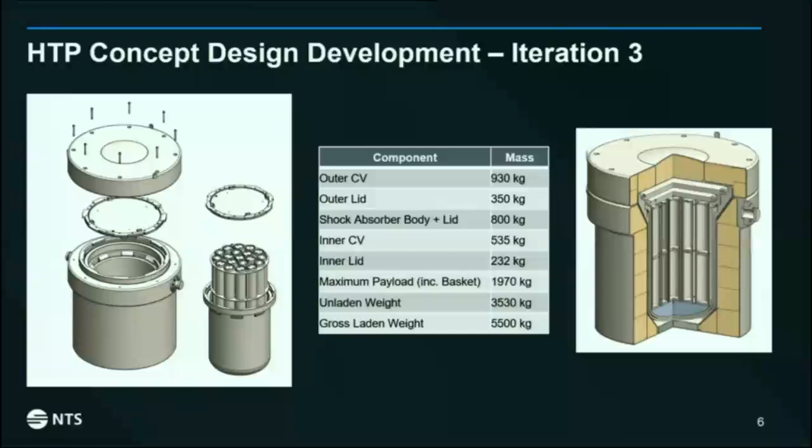We have 2 containment vessel lids, which forms that multiple water barrier. Then we have the main body, which is stainless steel, and that yellowish colour is wood, which is a shock absorbing material.

So this is how the package will be assembled. First off, you have the empty HALEU transport package. Then you take the outer containment vessel, load it in, and make sure it engages with those engagement points. Take the inner containment vessel and load that into the outer, then rotate it anti-clockwise to fit it in position.

Next up, this is the stool that I mentioned - you fit that in the bottom of the inner containment vessel. Take the basket, which is assumed to be loaded, and load that into the package. Next you load the inner containment vessel lid, rotating it anti-clockwise, and there are jacking screws in a bayonet lid design which engages the lid.

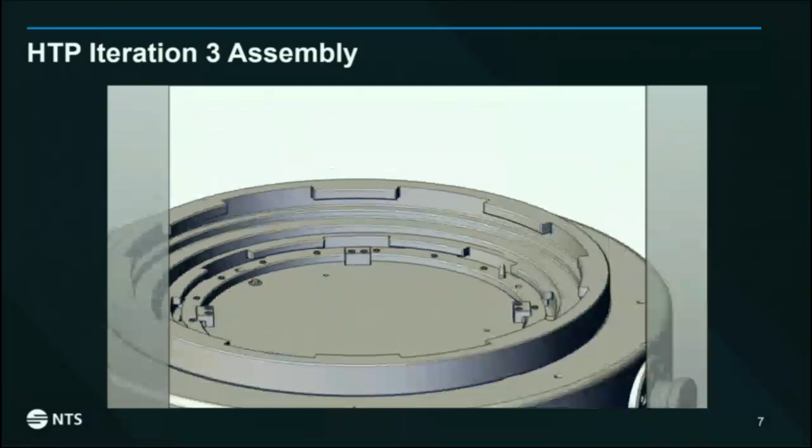Then repeat that for the outer containment vessel, using a very similar design - rotate that through, and then torque up the jacking screws to fix that also in position. Finally, take the package lid and put that on, then fit the 8 bolts.

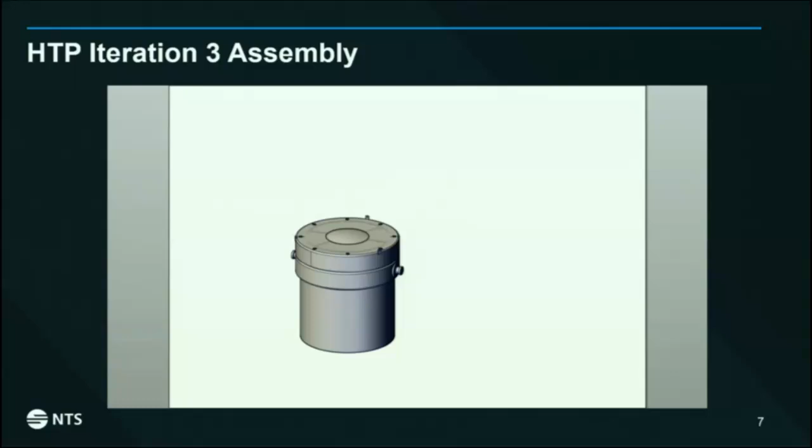The package also has some trunnions, which are the engagement points for lifting, and in a side drop these were actually acting as punches, so it was deforming the containment vessels quite a bit again, breaking the containment boundary.

Which led us on to iteration 4. Fundamentally it's still the same, using that Russian doll effect, however it is quite a bit smaller now. We've gone down from those 19 standard pipe channels to 7, so we've gone from 38 HALEU cans now down to 14. To compensate, the containment vessels and the package have been reduced in size.

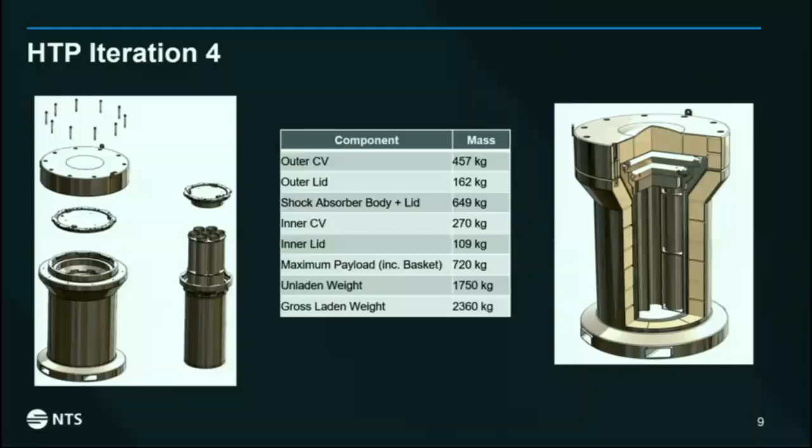So we reran some of the analysis - first off, iteration 3, the bigger package, we could only fit 3 of those inside the 20-foot ISO container, as mentioned. However, with the reduction in size, we can get 8 inside a 20-foot ISO. So although the packages are much smaller, we're actually getting roughly the same payload into a 20-foot ISO container, and now with forklift pockets it's much easier for loading into this container.

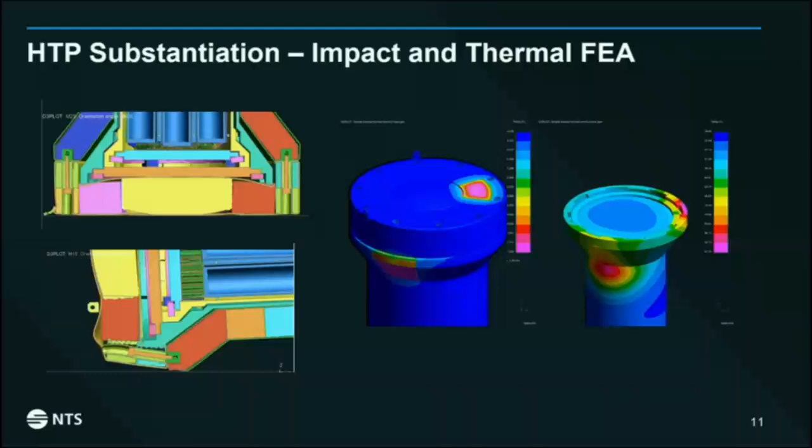On the right-hand side, there's some thermal analysis. We're evaluating what happens if a single block of wood ignites. We do have significant margin there, so there's not too much to worry about.

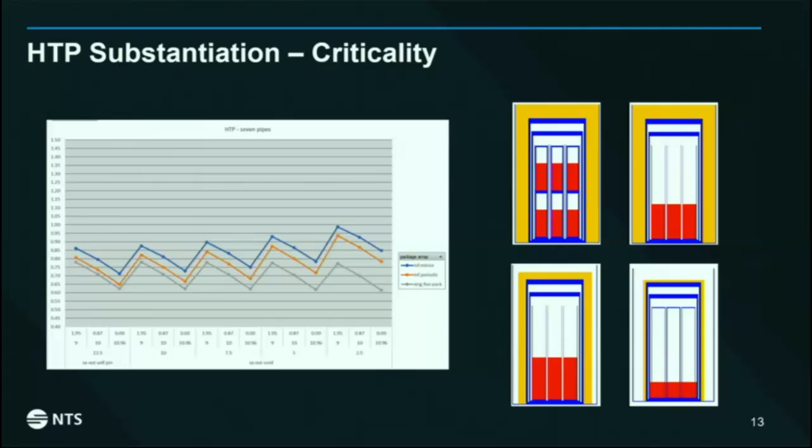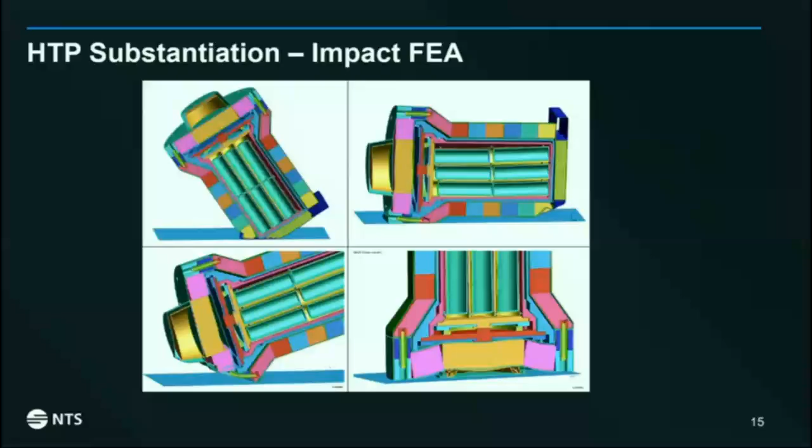Again, we looked at the impact. Those fabricated plates on the top did work as intended, and it did really help. However, we are still getting some lid gaps in the drop down, so there's still some margin we need to work on. Also, we didn't assess welding too much - that's something we need to do and are currently doing at the moment.

This is a manufacturing demonstrator. As part of the programme, part of the funding from the Nuclear Fuel Fund, the Nuclear AMRC over in Rotherham in the north of England are going to be making an HTP model for us. The two central images show some welding trials - this will soon be followed up by electron beam welding. The right-hand image is the upper neck for the inner containment vessel. They're getting underway with this, and this piece of work is due to finish end of March 2025.

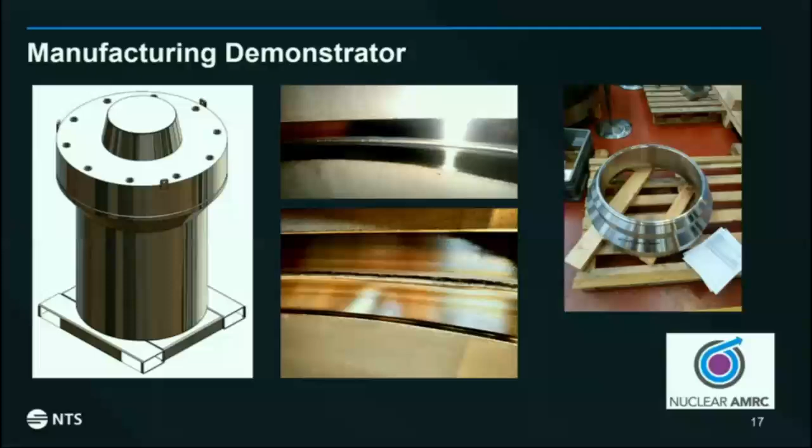So next steps, there's different ancillary equipment, lifting equipment for the package and the different lids, tie-down mechanisms. Basically, when you're moving this thing, make sure it all works as intended. A lot of this work is coming to a close. We're just finalising a few things. Need to do more analysis.

As the nature of such short time scales, the design is changing on a weekly basis, so we need to try and keep up to date with that analysis and make sure we are heading in the right direction. Further criticality assessments, that's probably the biggest concern for most. So we can definitely make something work, however, there is not much margin for error. And as mentioned in the previous slide, the Nuclear AMRC are manufacturing a model for us.

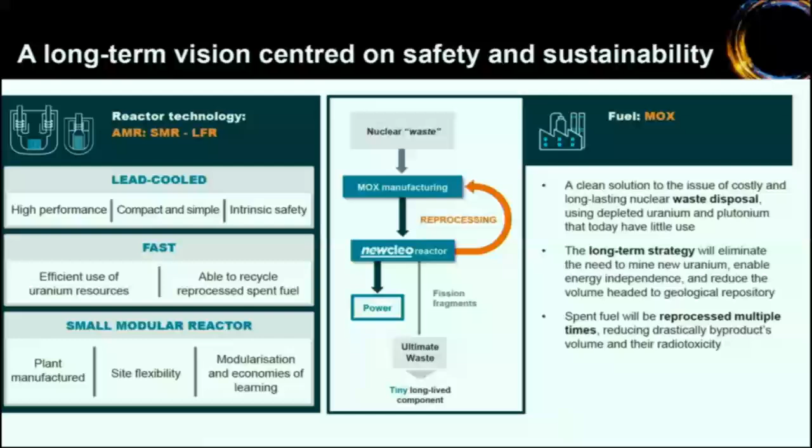Okay, so in terms of what we see are the benefits of closing the fuel cycle, first of all, we see this as making much better use, more effective use of nuclear material than we do currently in the cycle. So we seek to utilise material that is not currently moving in that cycle—material that is difficult, various types of plutonium in various forms, depleted uranium or reprocessed uranium. We can use either of those as part of our fuel design.

And of course, there's the benefit of removing the need for the front end of the cycle by utilising materials that already exist and are already available to operate in our cycle. So the need for mining, conversion, enrichment—we don't need to do that, and we can make use of materials that are already at some stage through that cycle.

So we see that our proposal will be significant in helping to, first of all, stabilise plutonium stocks and help Europe develop more by way of energy independence. And then, of course, there's the benefit of making sure that we can reduce the volume and radiotoxicity of material that would go to a geological repository.

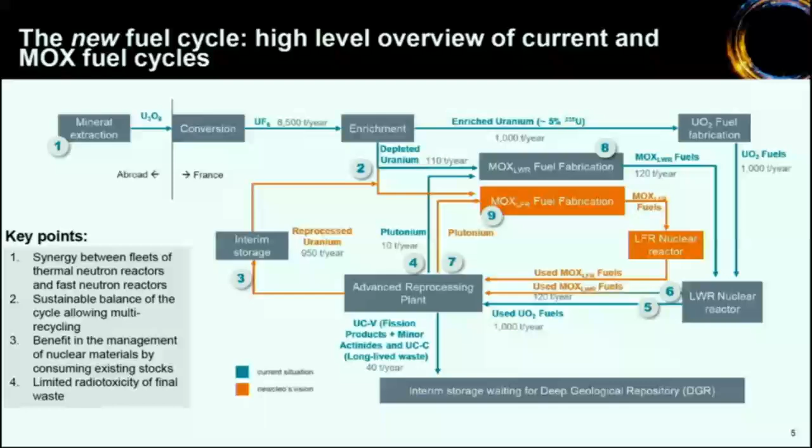Okay, so in terms of what we're doing with the composition of our fuel—mixed oxide fuel, so plutonium and depleted uranium—we can use a variety of depleted uranium sources. So traditional depleted uranium from hex tails, of which there is an abundance around the world from the enrichment activities for thermal reactors. We can also use reprocessed uranium as well.

So no need for re-enrichment. We use that material as it is. So again, a great example of not requiring the front end of the cycle. There is already material out there which can be utilised.

Plutonium, the plant that we're designing is very flexible and can take a variety of feed materials, so it's got a very broad feed material envelope. We're able to take material, plutonium, that is not currently able to be used, whether that's scraps or aged material. Our facility will be able to cope with that. And of course, plutonium can be burnt far more effectively in a fast reactor than in a thermal one.

So for fuel fabrication, we are currently designing a fast reactor MOX plant. That will initially be a 40-ton module design, and then we will be able to add 40-ton modules up to a total of 120 tons. The plant design has recently been through the ASN pre-licensing process in France, which went very smoothly, so much so the end of a process seminar wasn't actually required.

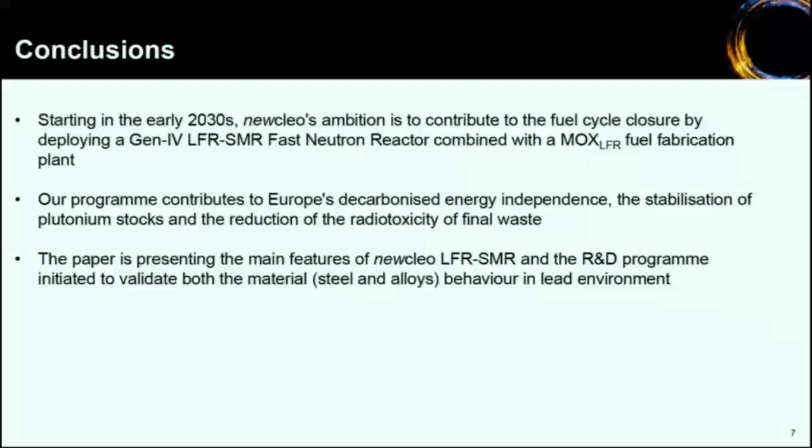I think that's it. Any questions?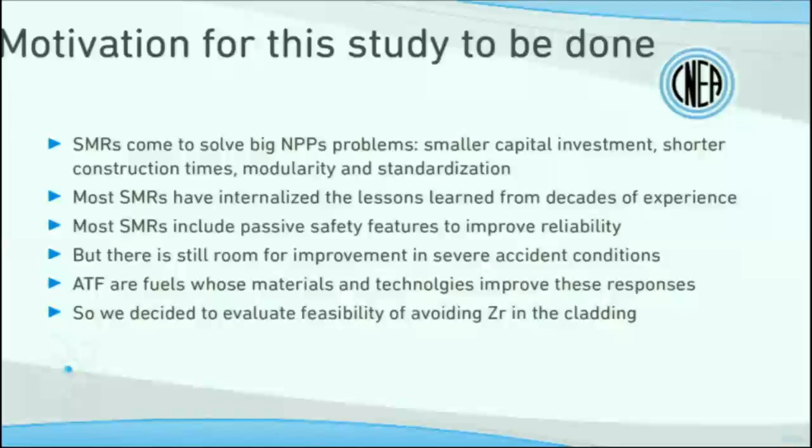What is ATF? Initially it stood for accident-tolerant fuels, but it seems we don't like the word accident, so now we call them advanced technology fuels. These fuels, whose materials replace the conventional materials for the cladding and the fuel pellets, have a safer behavior during accidental conditions. So we said, okay, let's evaluate the neutronic feasibility of avoiding zirconium in the nuclear fuel of our reactor design.

Amongst the different ATFs that we could try, we have focused on avoiding zirconium because of its problematic behavior in accidental conditions. There are other types of ATF that could be evaluated, but we focused on avoiding zirconium. FeCrAl was chosen due to many promising results found in the literature during accidental and severe accident conditions. But when we replace zirconium, we are increasing the neutronic absorptions in the fuel. So there is a cost for replacing zirconium. This work focuses on the neutronic implications of increasing the cladding absorptions.

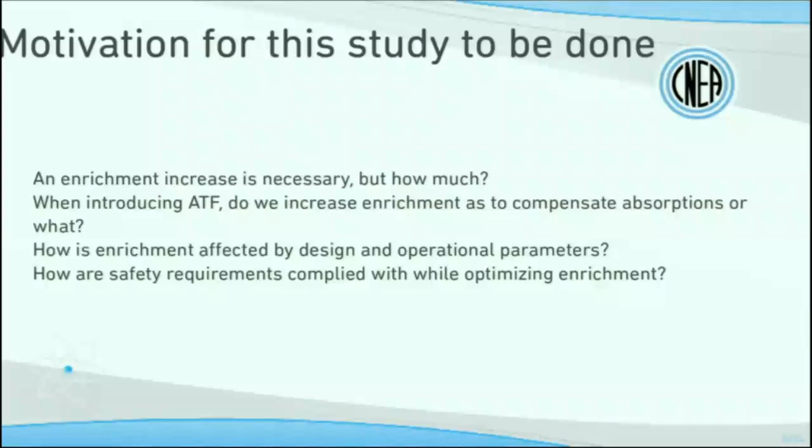How can we compensate for that absorption increase? Let's talk about that. An enrichment increase seems obvious and necessary, but how much do we have to increase the enrichment? When we introduce an ATF fuel, do we increase the enrichment just to compensate for the higher absorptions, or do we use another criteria? How is enrichment affected by design and operational parameters? And how are safety requirements complied with while optimizing enrichment? All these aspects we are trying to answer in this presentation.

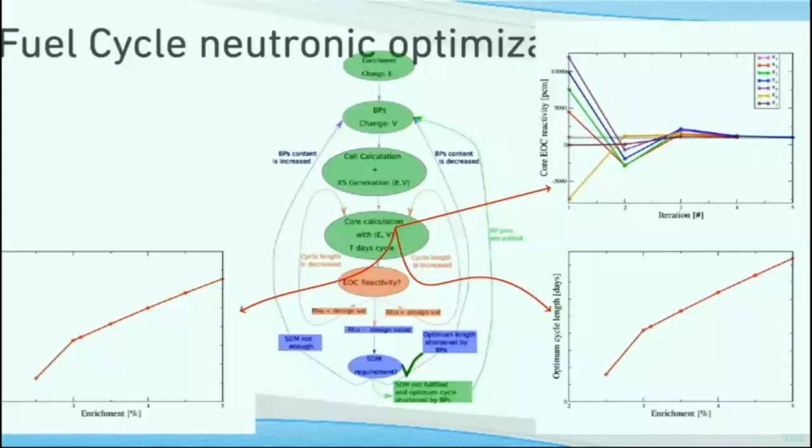However, when you go to look for the shutdown margins, what you find is that if you only raise the enrichment, that criterion is not met anymore. The shutdown margins are not met. We could easily say, okay, we can put more control rods, and we can easily calculate that. All the shutdown margins become okay, but this is something we could calculate and easily say, yet not so easy to implement in a real reactor.

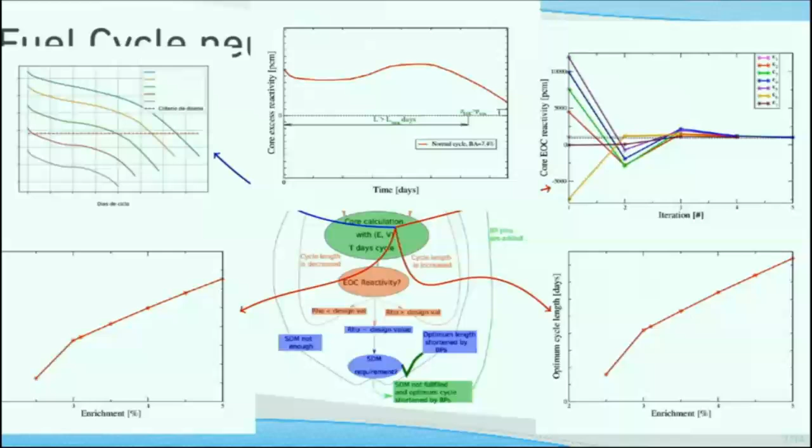You have layout problems, physical and space limitations. So we decided not to use this solution and go for another approach, a little bit more complicated, but I consider more elegant. What we see here is the reactivity evolution of the reactor during the cycle length. What happens if in that...